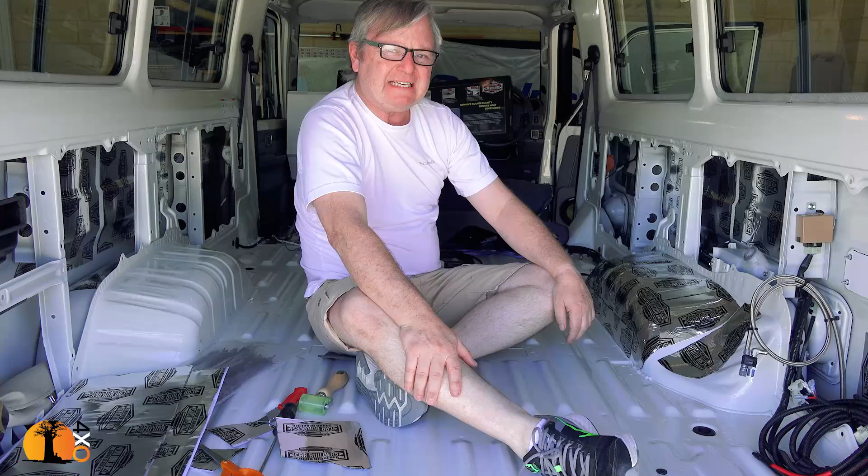Car Builders is an organisation in New South Wales specialising in sound insulation materials, and they came back with a recommendation for a 2-stage treatment. This is the material here. This is called Stage 1 Sound Deadener. It has a very thin aluminium top side, and the underside is a sticky, thick, dense, rubber-like layer.

It's almost a cross between rubber and silicone the way it feels, and that sticks firmly onto whatever surface you put it on. And you basically lay it anywhere you like, and you get yourself a little roller like this, and you roll it on. Application is extremely easy, but it's also quite heavy.

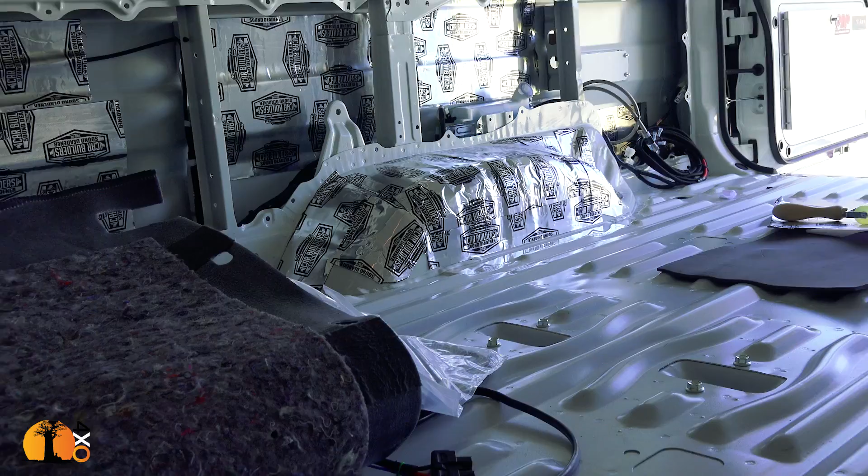So I've decided that if my primary objective was absolute silence, which you might go for if you were doing a luxury vehicle, you would lay this absolutely everywhere, and then Stage 2 on top of that. I'm doing Stage 1 in part of the vehicle, and both Stage 1 and 2 in other parts of the vehicle. So in the back here, I'm right in the middle of it right now.

I have used this material on the sides. I have not covered every single square centimetre with this stuff because, well, I could, but I don't think it's necessary. But up front, I have, because of course up front is where most of the noise is going to be generated, engine, gearbox, and that's where I'm going to be sitting.

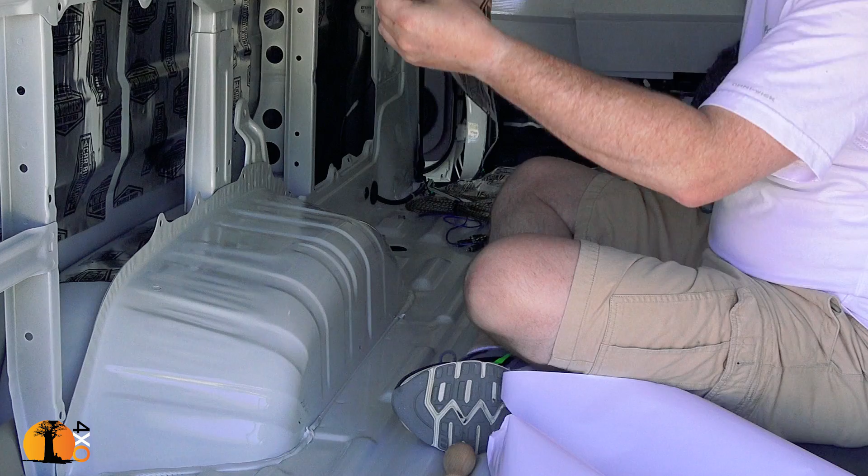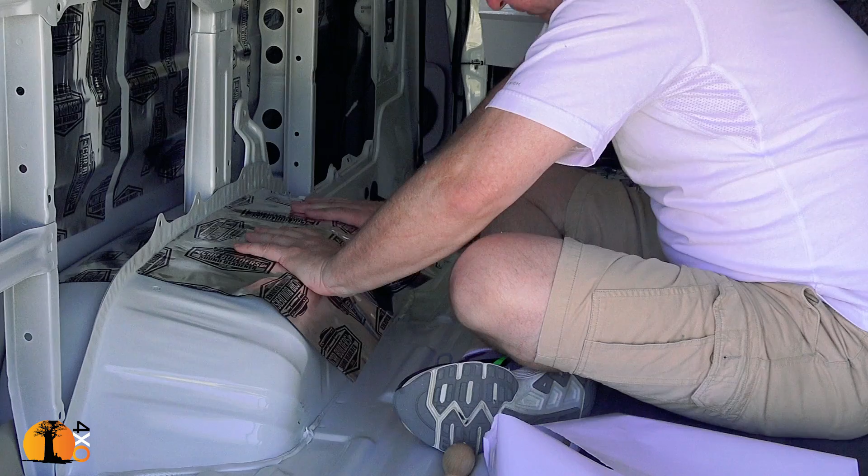Well, let me just show you how to do this one little piece, how easy it is. I just wiped it off, it's clean, and you take off the backing. So I'm doing the wheel arches because the wheel arches are obviously a place where there's going to be a lot of rebound, a lot of road noise directly from the tire coming up. So I rub it down smoothly like this. Okay, and I get it kind of smoothish, and then I get the roller out and I roll it.

I reckon to do the whole of the back of this car would probably take half a day, not more than that. It's very easy. There, that's the first piece. Now the second piece, I would now cut with scissors another piece for here.

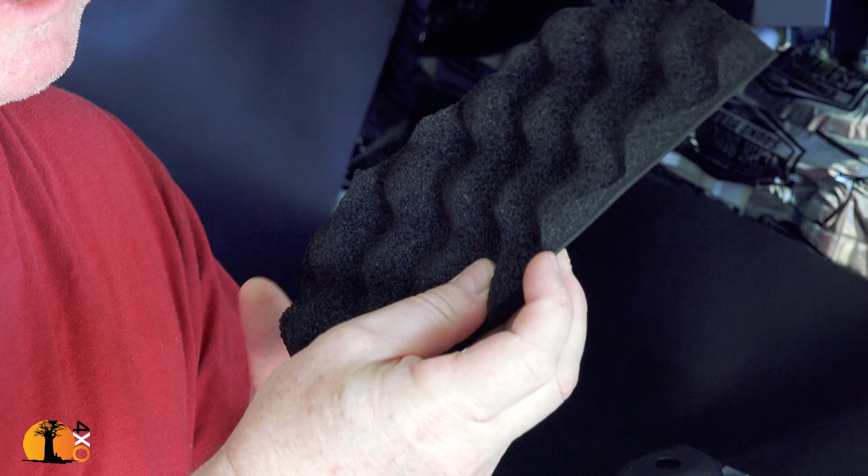Right, Stage 2, I've put down the mass noise liner. It consists of fairly heavy rubber, about 2 millimeters thick, and underneath it a closed cell sponge, shaped, I've seen this shape in sound studios. They line the walls with it to prevent sound bouncing around. So this is laid bumpy side, foam side down on top of the Stage 1 sound deadener.

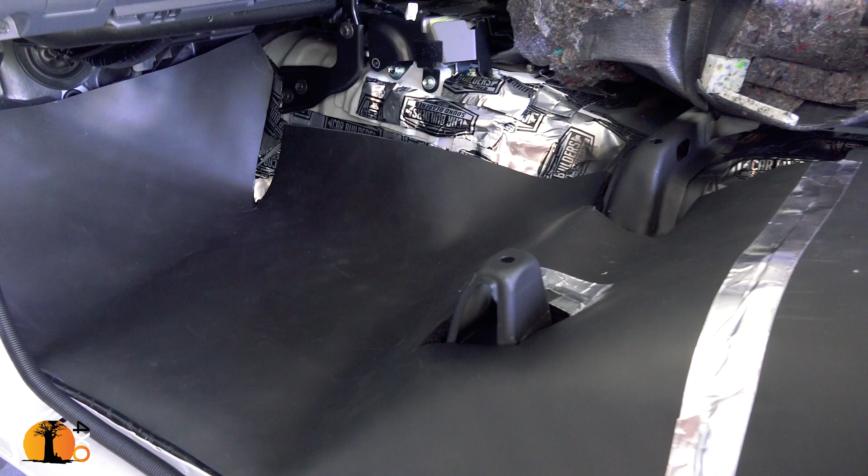Now I could have covered the entire vehicle with sound deadener and put the mass noise liner on top of it, but I have to think about weight, and I obviously have to think about cost. So what I've done in the front here is I've given it the full treatment, but in the back I haven't. So in the back I've just used the mass noise liner, single layer, straight onto the metal floor.

On the wheel arches, what I've done is just replaced the Toyota's own cover on top of the sound deadener. So I've just used that on the wheel arches, which is the main area where you're going to get a lot of sound reverb around the wheels.

In terms of putting sound deadener here on the bulkheads, on the walls, it's not really worth spending a great deal of money. Let's put it this way, it's money less well spent than putting it on the ground. So I have put some around the sides here. I haven't plastered it with the stuff. This will have some suppression, but I haven't spent too much money and too much weight on dampening sound from the sides, mainly from the floor.

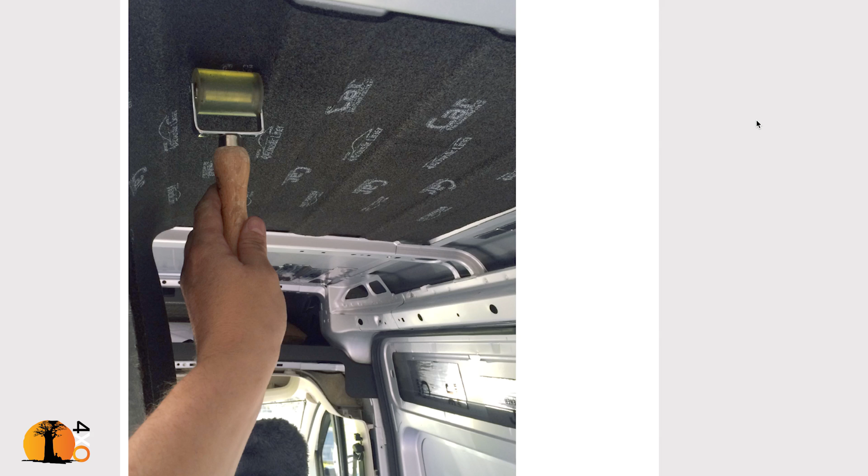Now if you wanted to do the roof, I'm not going to do the roof because I'm doing a completely different roof conversion, but there is a product for the roof of vans, any vans.

I was looking through Car Builders' website and I came across, really by pure accident, they had a thing on Troopcarriers. And when I approached them, I didn't realize that in fact they actually get a lot of clients with Troopcarriers, because obviously they see a need in the market. Different pricing options. It was really well done and they gave me good advice. They didn't want to just take my money.

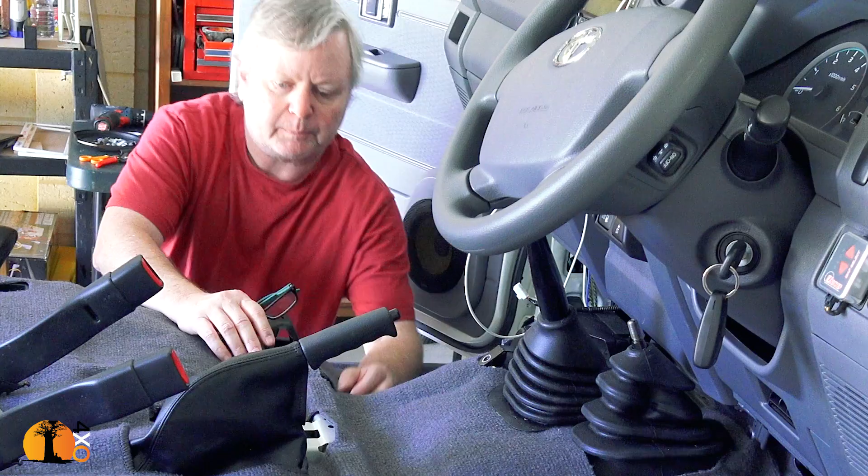So hopefully here I've got a good balance, and I think the entire thing is probably between 25 and 30 kilograms of material. So now I replaced the original carpet. I have taken the under felt off, which is a very common garden, cheap as chips underlay that Toyota and most car manufacturers just attach underneath their carpets, especially in budget cars. So I've removed it all. That gives space for the matting, which is quite thick.

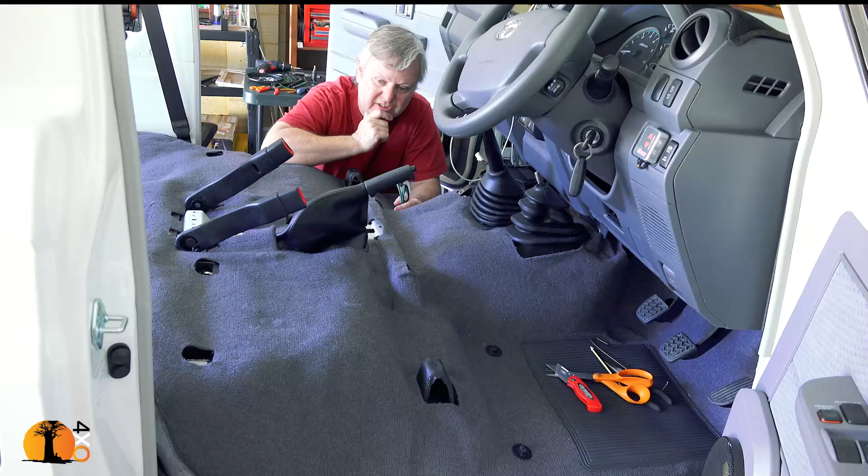Now I'll put the seats back, but maybe what I should do before I put the seats back is show you something that is uniquely Australian and will transform the interior of this car. So much of my research for building the vehicle has to be done online. Looking at reviews, looking at products. I put up an idea on Facebook or whatever, and I get all kinds of people coming in, have you seen that? Have you seen this? And it's been absolutely fantastic.

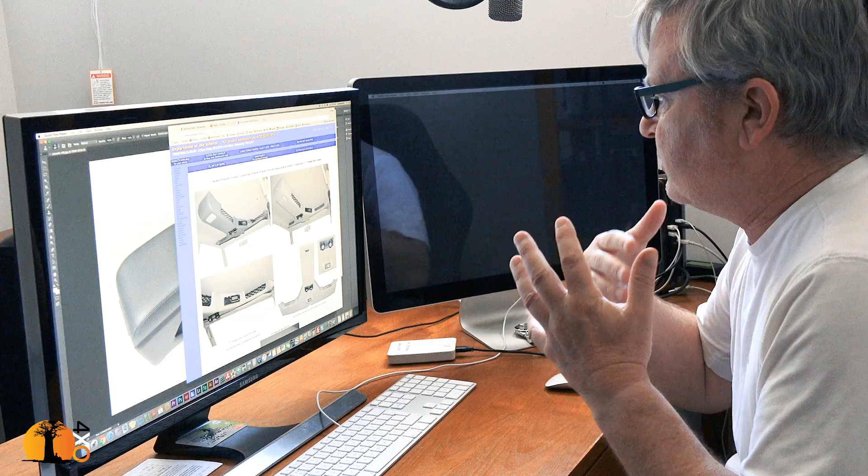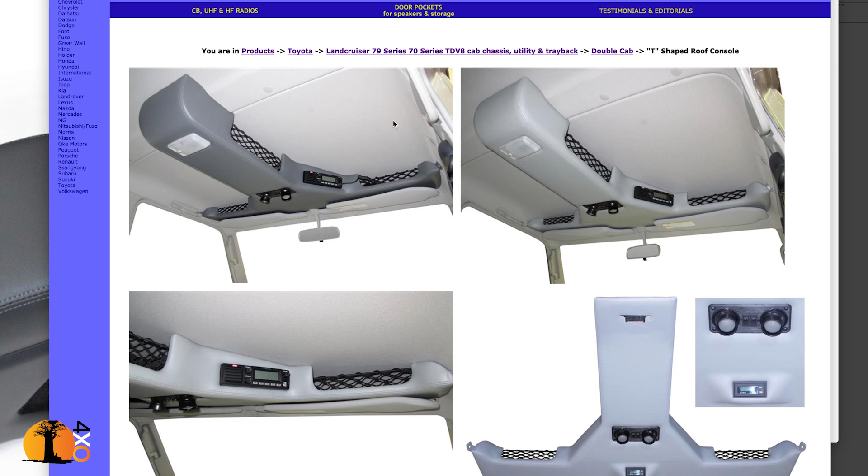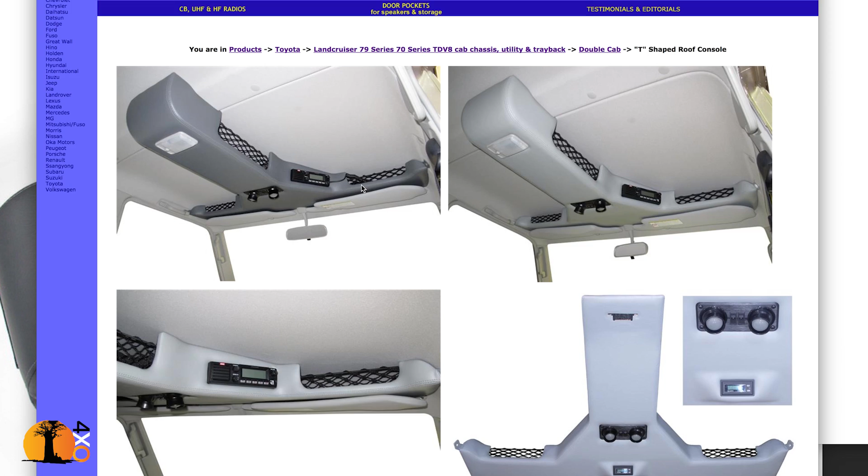And one of the products that I have discovered since being in Australia, I didn't know about them, is this one here. It's called Department of Interiors, and they build interiors, not just for four-wheel drives, for a very wide range of motor vehicles. And this is the kind of thing that they do. This is the T-shaped roof console with lights, with fitting instructions. They even have little videos where you can see more about fitting.

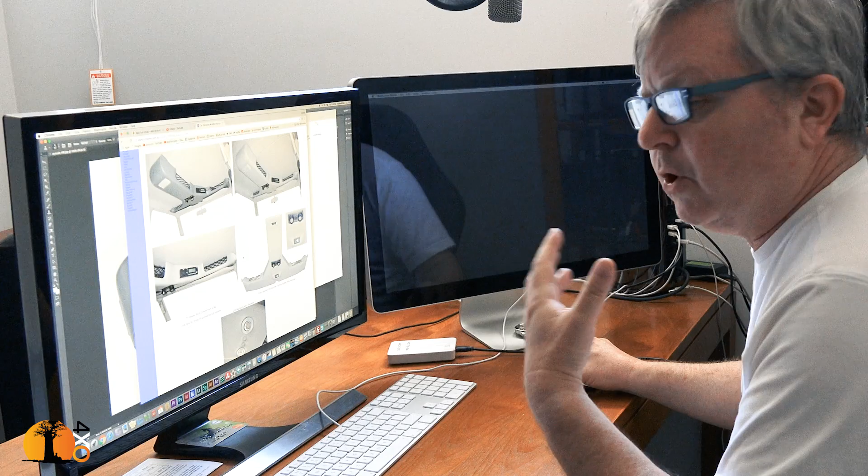The fitting looks very straightforward, and they're using existing mounting points like for grab handles and the mirror and various other things, so I don't have to do any drilling, which makes it very easy, which is smart. What I subsequently learnt is that when ordering, you actually customize your own product. So here is the console.

Now I've been working out, the Land Cruiser only has one standard cup holder, but here I can easily add two, and I've been moving these bits around here. So I was thinking about having the boost gauge there. That's just got the USB, but with shallow pockets. I prefer the deeper pockets. It's like my birthday every few days in the White household, because I know exactly what it is.

Australian company, family-owned business. They specialise in improving the interiors, and of course the Land Cruiser could do with a lot of improvement, don't you think? So there, that will be left-hand door that now bolts onto the panel, and my speaker will fit inside like that. Isn't that nice? Nicely made too. I have ordered some other items from them. A floor console with an armrest and a cubby hole, and they have matched the grey interior of the Land Cruiser,

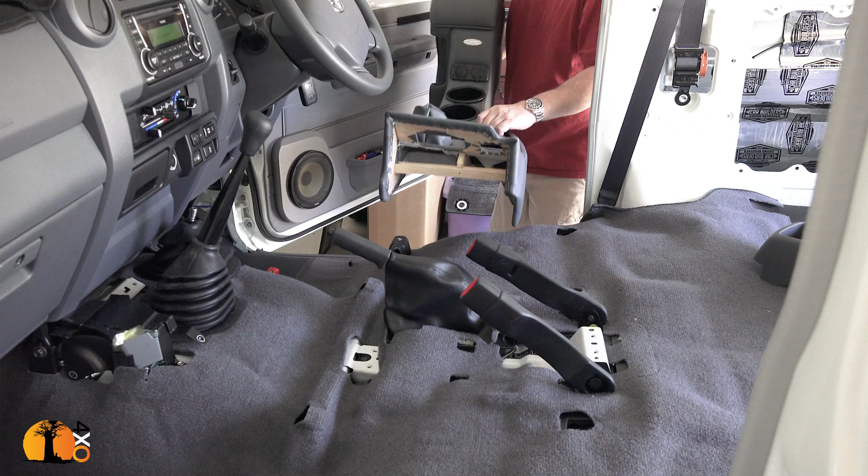and I must say build quality is excellent. That's all plywood, there's no plastic at all, this is handmade, the finish is exceptional, and I think that's going to be enormously practical for my truck. That's the kind of accessory you can get in Australia for Land Cruiser 70 series. Now it comes with mounting instructions that are very concise and specific to each individual product, and I'm now going to follow those instructions and we'll see how it goes.

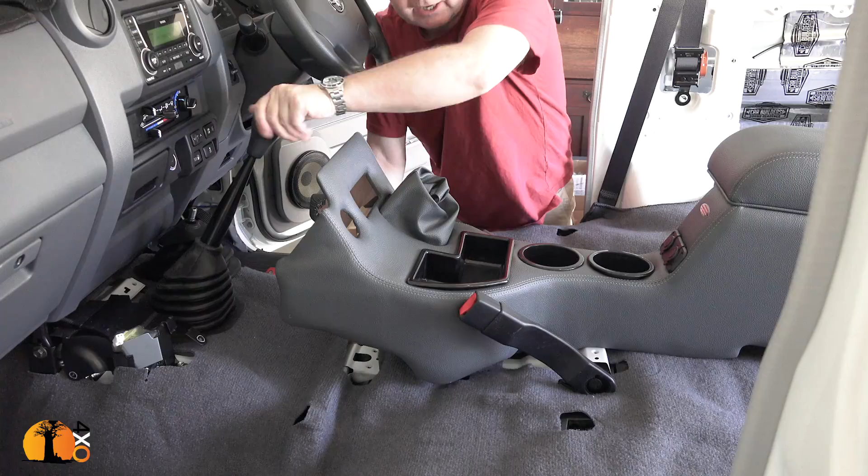Time now to come to some kind of conclusion with regard to the sound insulation. That's the app now, doing exactly 100, and if the reflection isn't too bad, that'll give you an indication of the reduction in sound. Now those numbers don't really mean very much to me. I'm getting a little bit of extra sound today because it's rainy. The impression is that there's far less sound bouncing around the cab. So it's made a huge difference to the comfort levels, and that's after all what we're trying to do. We're trying to improve the comfort of the vehicle.

Comfort levels far improved. I can still hear quite a bit of sound coming from the back, this big hollow cave that I'm towing behind me, but very little from the front. Front wheels, nothing. Engine noise really down. So it's made a huge difference. I did not put any roof insulation in at all because I'm changing the roof. I'm modifying the roof and putting in my camper system, which will reduce sound being bounced around the cab, but will increase wind noise.

But the end result is, was it worth it? 1,000,000 times yes. In terms of my interior comfort, the console is wonderful. I've had it in the car now for a few weeks, and it's so nice. It's transformed the vehicle. Extremely pleased with that. I won't be getting a Department of the Interior roof console because my changes to the roof do not allow me to fit a standard unit. So for now, that's it.